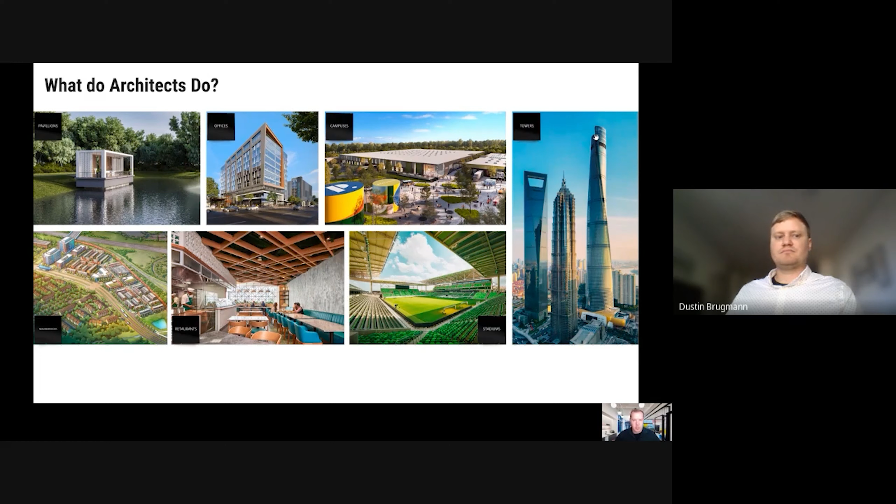In terms of roles, there are many different roles when working on any of these projects. On a larger project, some of these roles might go to individual people. You'll have a designer, a code expert, an urban designer, an urban planner, an engineer, which we call a project architect, who helps put everything together, a manager running the business side of things, and then sustainability experts. So on any given project we can have many different roles for people, or on a very small project it could be one architect doing all of these roles themselves.

So an architect really has to know a lot of different subjects, and we're constantly learning about all different manner of things that affect the built environment.

One of the things that I like about architecture is getting to draw and getting to create things. And the way we do that throughout the process is through hand drawing. We do a lot of computer modeling. We do coordination, so we work quite a bit with other people. And then when the project finally gets into construction, we're making site visits and working with contractor partners to make sure that everything we've designed gets built smoothly. So it's a constant process of learning and communicating ideas and meeting with different partners along the way.

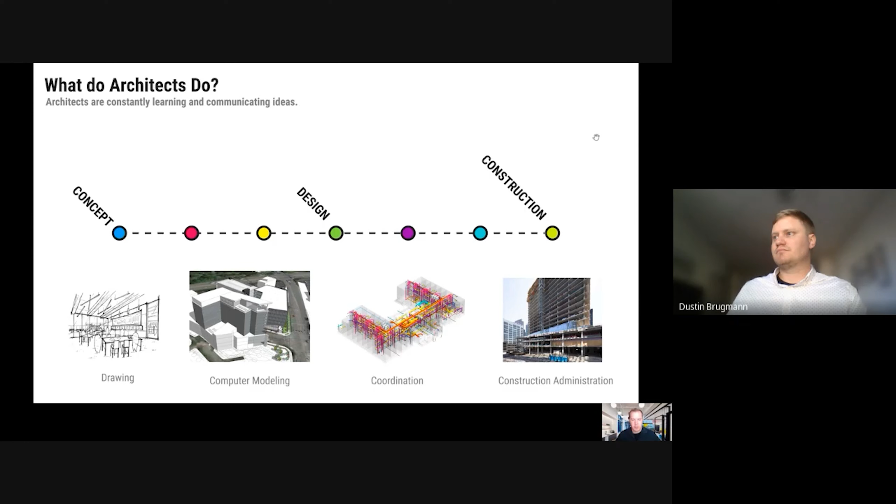And within Gensler Raleigh, being that we live in such a growing and dynamic area, we've been fortunate to work on a number of different projects, sizes and scales, from office buildings to interiors to retail shops and plazas. So as an architect, you get to work on a number of different things, meet new people, go different places. So it's really a fun and interesting profession.

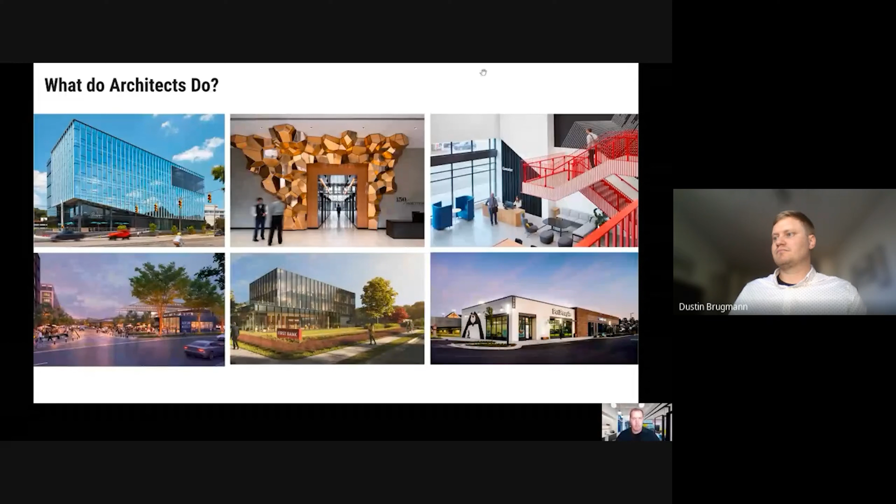Now that you've been introduced to the field of architecture, we're going to take you through a project example that will give you a better idea of what architects do.

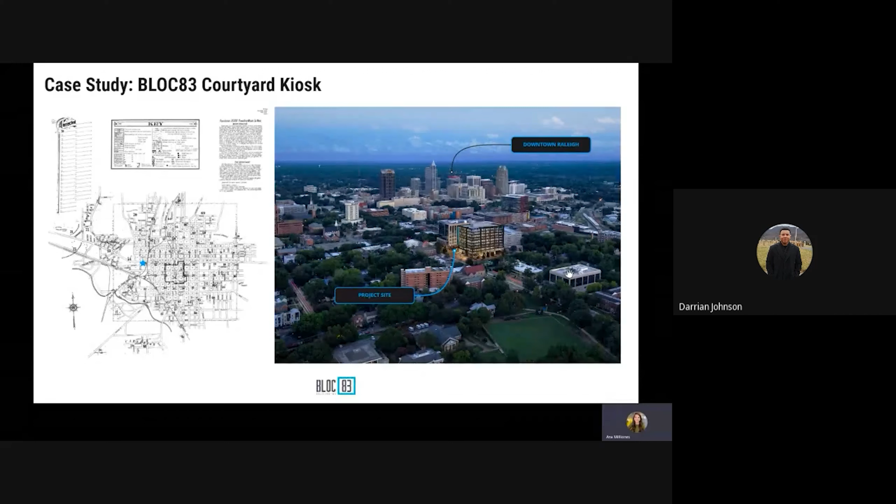We collaborate with landscape architects to design the areas around the building, like paving, planter boxes, and benches. The site is just as important as the building itself, and you will have an opportunity to design your own site with your project. Buildings start with an idea and a purpose.

A building's purpose is centered around how people will use it and how it's creating a better experience for its users. This is a retail kiosk, and it's intended to have a cafe-type program that can serve tenants from the two buildings along with the general public.

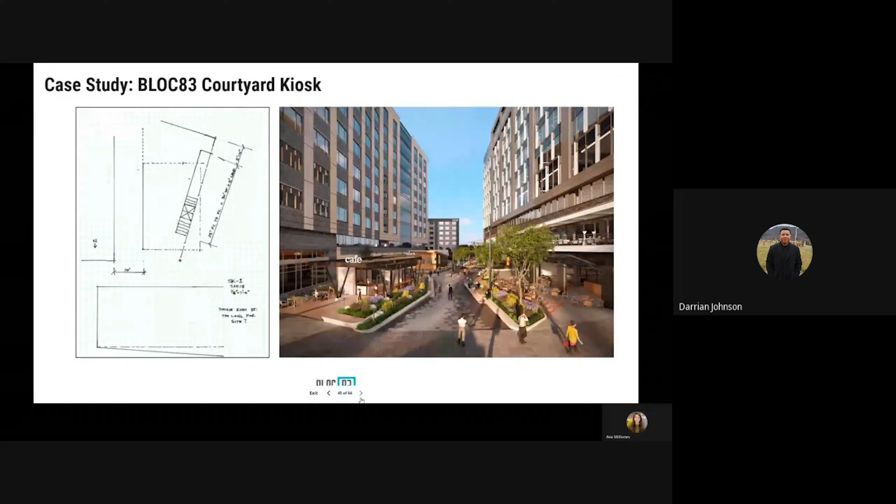During schematic design, it's important to push yourself on ideas and ask what if. It's the phase to really be creative and try new ideas, even if they may not work at first.

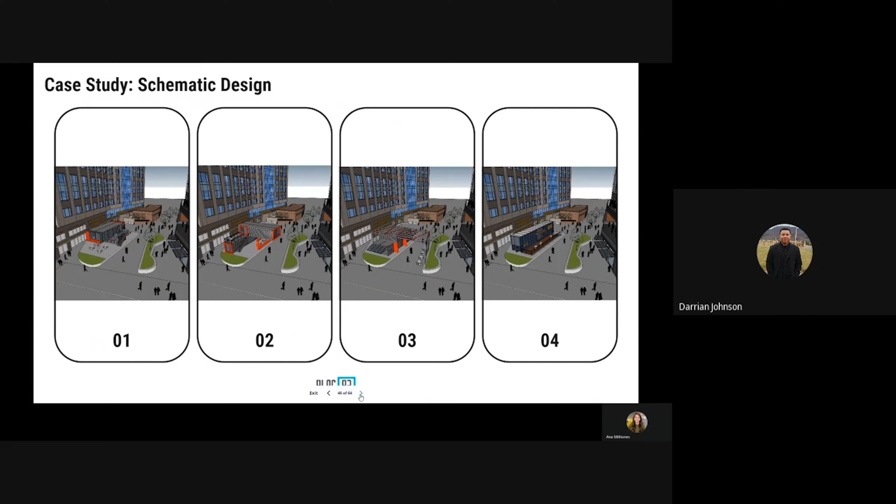We work through floor plans to make sure the right spaces are next to one another so we can ensure the building will function well. After schematic design, we move into the next design phases where more and more detail is layered onto the initial idea until the full project is complete.

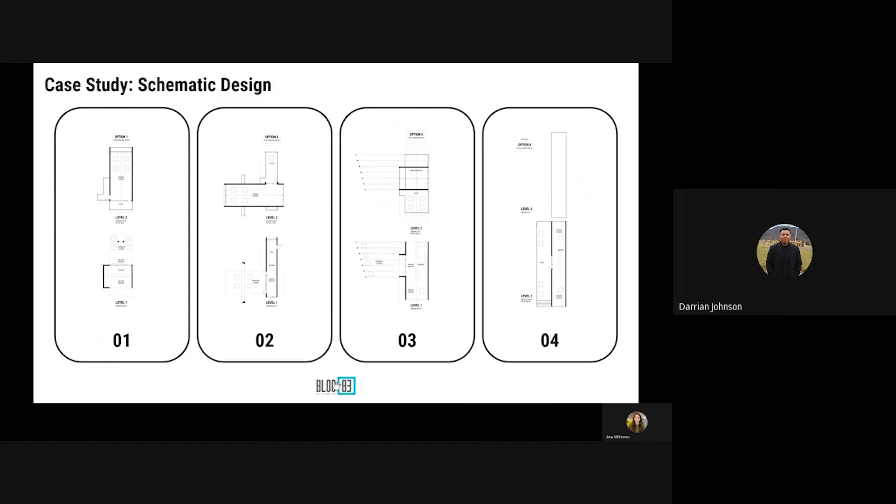The central part of the cafe is enclosed program, and the two ends open up as the outdoor space where patrons can enjoy their coffee and food. It can also be used as an outdoor work area throughout the day for the building tenants. You can see how integrated it is with the site design and how careful attention was paid to the user experience.

Next, we're going to take you through the construction document phase and show you what drawings architects create in order to realize a building like this.

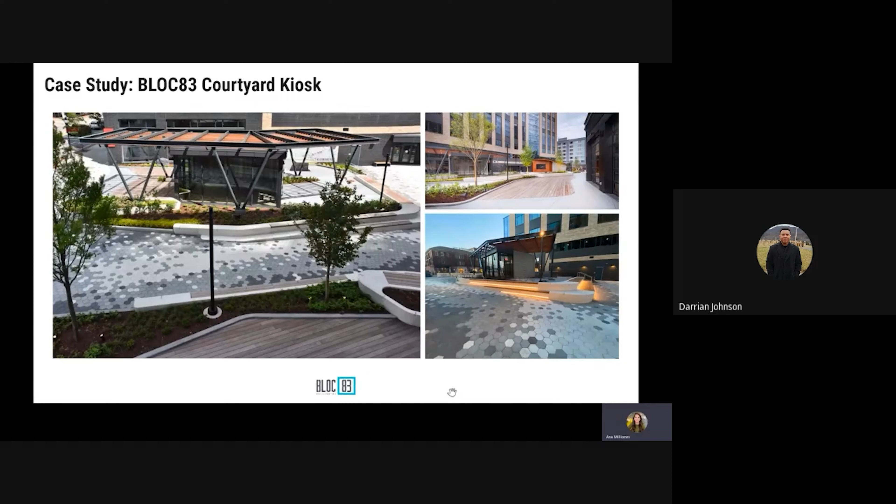I'm going to elaborate on what Kevin discussed, what an architect does, by diving more into the case study Anna presented and show you some of the drawings created to communicate to the contractor. An architect not only has to design a building, he or she must create a set of instructions in order for that building to be built. Firstly, a set of construction documents contains two things.

The actual drawing set, and a project manual with written instructions on how to construct the building and carry out the project. The drawing set or plans, as seen on the left-hand side of the screen, contain images that depict the actual building being built. Specifications that are part of the project manual, as seen on the right, contain written instructions on how to carry out the project and put those parts and pieces together.

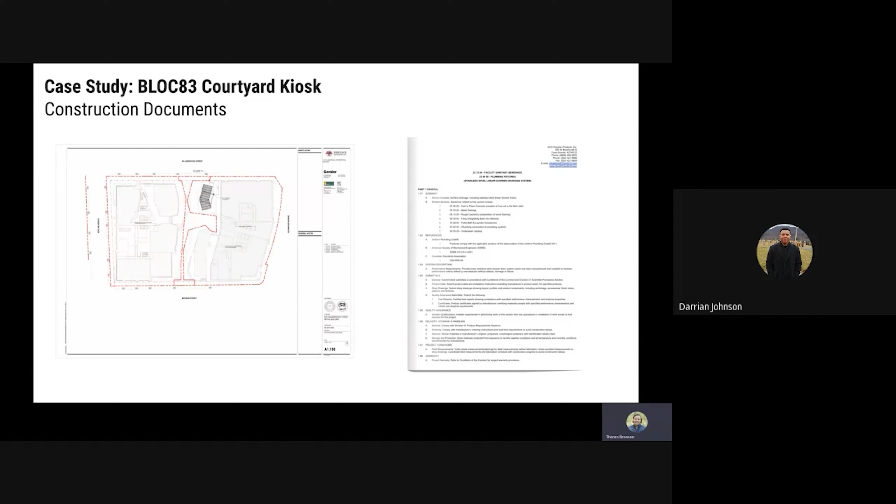With construction drawings, the images are always to some scale, so that way they accurately depict the building or elements, and they can be measured from the actual drawing set if needed. You'll learn more about this later, but a common scale is 1/8 of an inch equals a foot. Basically, every time the contractor measures 1/8 of an inch on the paper, it equals 1 foot in real life. Therefore, if the contractor measures 1 inch on paper, he or she knows that the element in real life will be 8 feet. The larger the fraction, the more zoomed in the drawing is. Again, you'll learn more about this later.

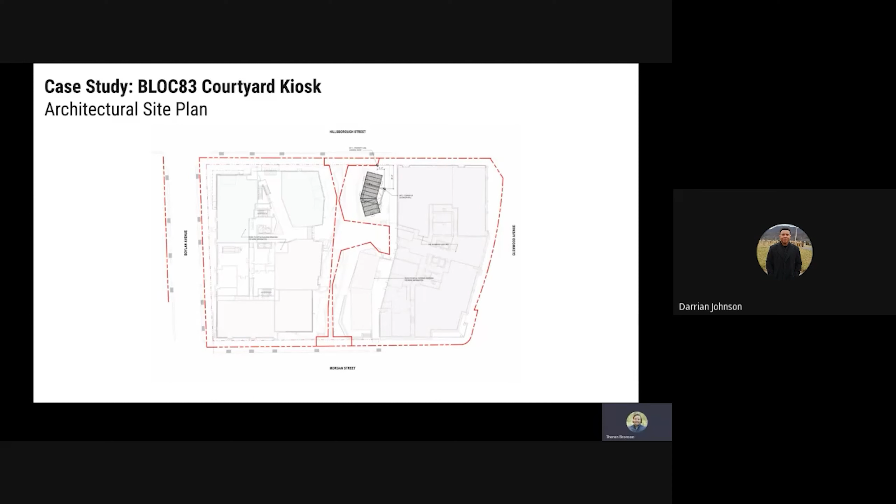In order for a contractor to be able to lay out a building, one of the first drawings needed is an architectural site plan that shows where to place the building on the site. Usually a reference point to the property line or a marker on the site is used to dimension the building to the actual site. You can see here that the reference point is at the intersection of these two property lines in red. The architectural site plan will show adjacent buildings, property lines, sidewalks, and roads, while other site plans in the drawing set, provided by other parties like the civil engineer, will show utilities and other pertinent information to the project.

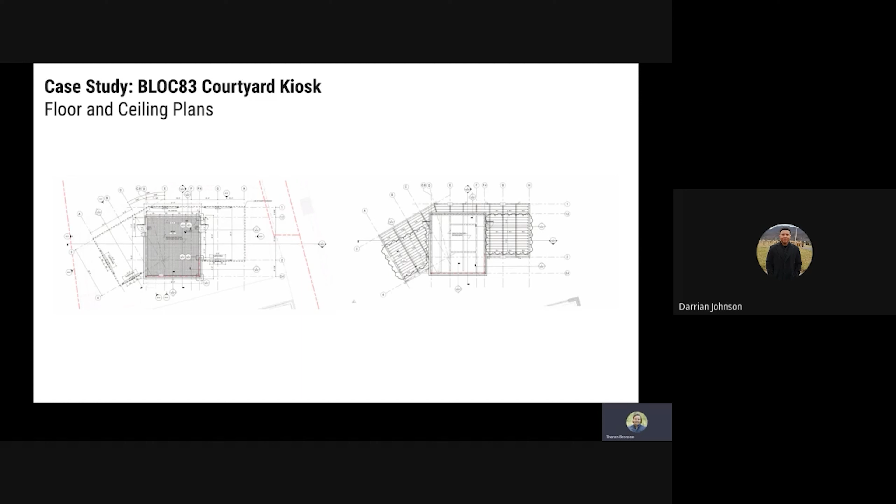The next set of drawings will be the floor plan, as seen on the left, and the reflected ceiling plan, shown on the right. These two drawings are horizontal cuts through the building showing what it would look like if you sliced the building horizontally and looked either up or down. Think of it like a hamburger bun. The ceiling plans are called reflected ceiling plans because they are flipped in order to align with the floor plan to make them easier to read. If they weren't mirrored, the information would be on the opposite side. Again, imagine a hamburger bun opening up and how it would be flipped. These plans show the horizontal X and Y dimension relationship of columns, walls, and doors, and they provide dimensions so the contractor can lay out the building accordingly. Sometimes references to heights are shown for ceilings and other elements if they're not called out elsewhere in the drawings.

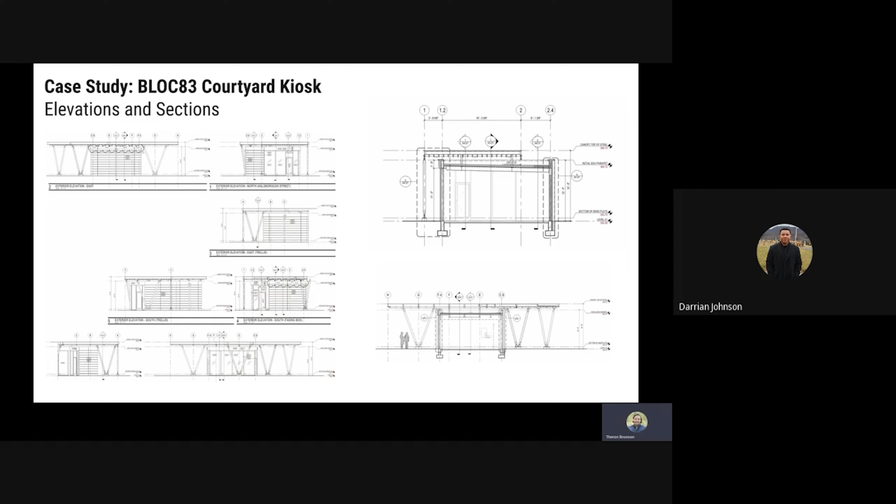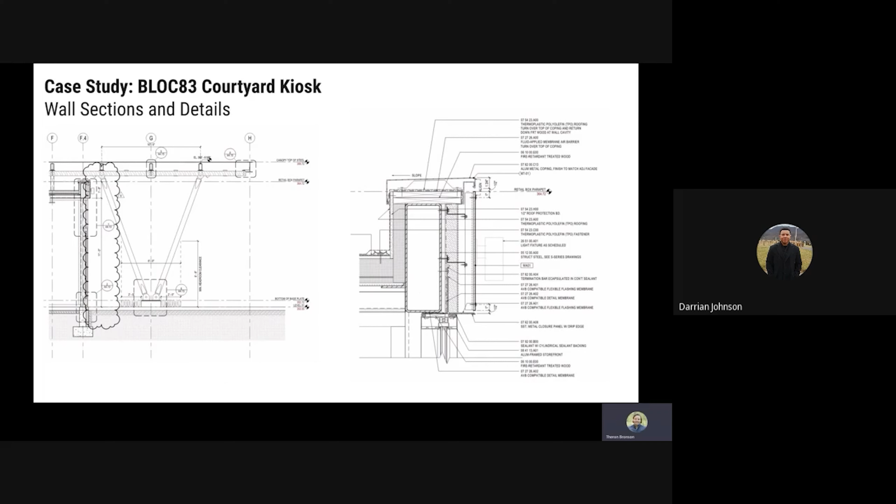Because buildings are complicated, zoomed-in drawings called wall sections and details are needed to show the assemblies of the envelope of the building. The envelope, also sometimes called the skin, is the exterior materials that enclose the building. There are several layers and parts that all work together, hence why it's called an assembly. Here you can see a wall section to the left and a roof-to-wall detail, called a parapet, to the right. To touch on scale quickly, the wall section shown on the left is 1/2 inch equals a foot, where the detail on the right is 3 inches equals a foot.

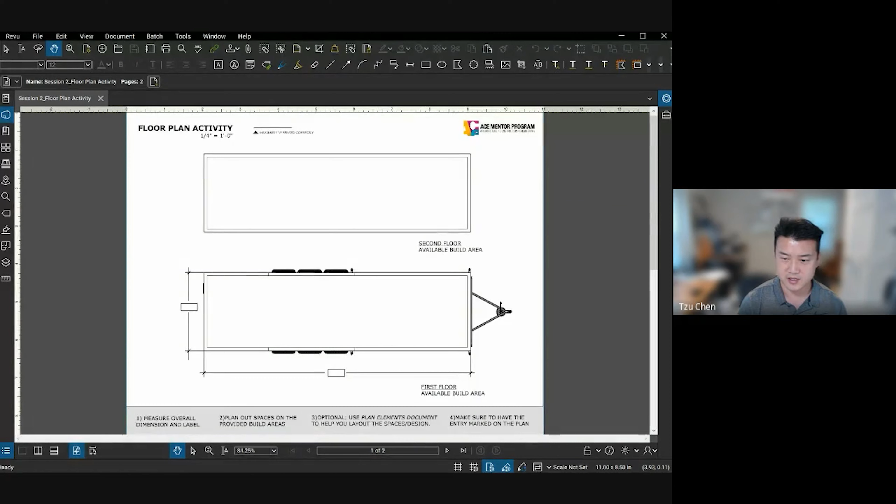Once Dina is bringing that up, the activity should be posted on your Google Classroom as the second activity. I think you guys had the scale activity the previous week, so she's showing you the activity associated with the architecture. Is everyone seeing the floor plan? I think you are. Yes? Okay, sorry, I can't see you when I do this.

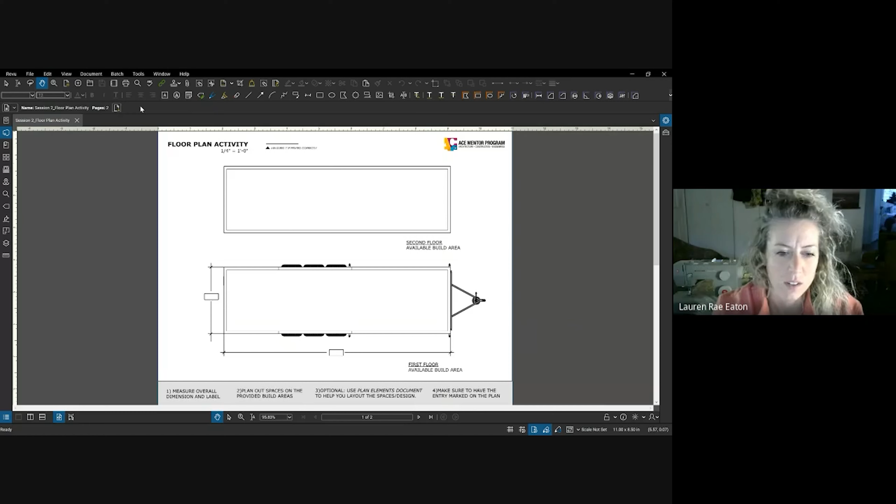Just a quick note for the students' benefit, this is just a PDF file, accessible to all of you. If this program seems unfamiliar, it's called Bluebeam. I'm not sure if Bluebeam is available to students for free. There's a trial version for 30 days, but I haven't seen a student use it. A lot of architects and engineers use Bluebeam, so this may look different when you open it on your screen.

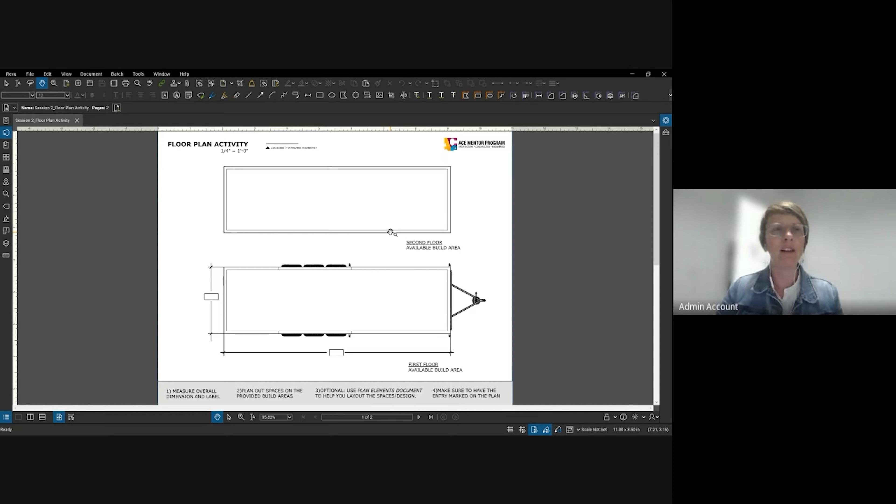But the floor plan activity has 2 pages here. And the intent of this is not to be the be-all end-all of your kiosk floor plan, right? This is just to get you started, to get practice with using the scale, understanding architectural scale and drawing to scale.

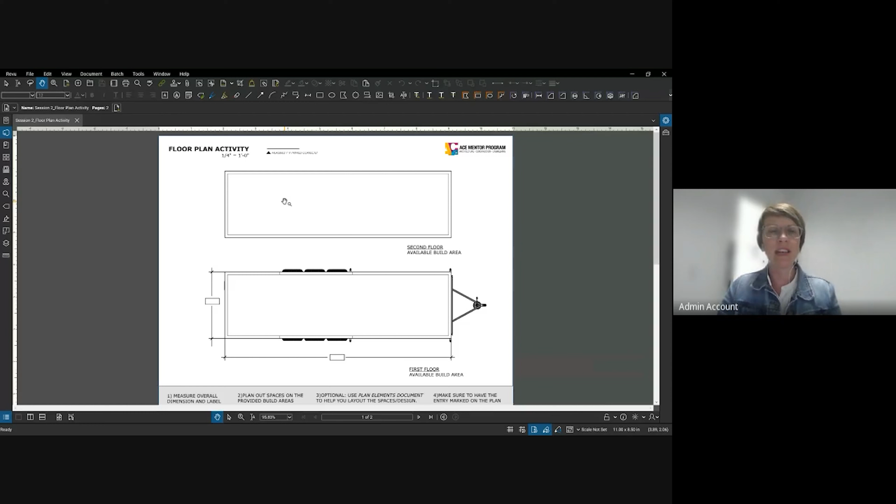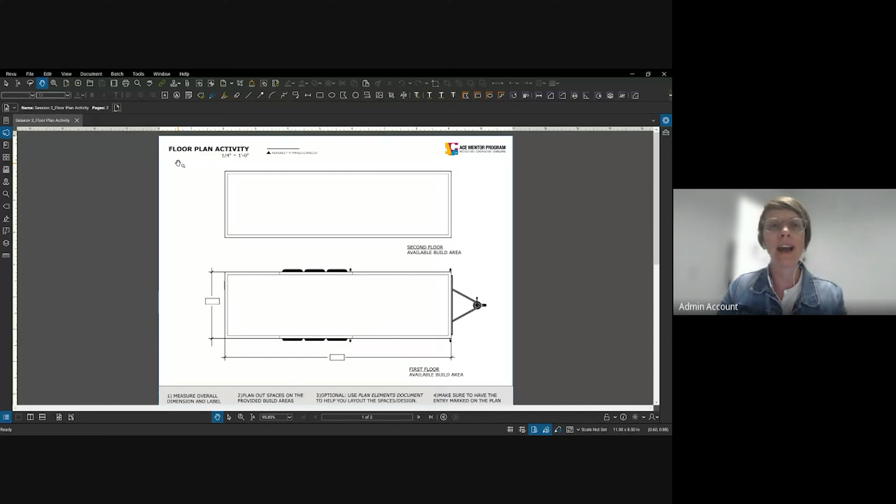If you remember from the video, or if you came in late after the video, Theron talked about the hamburger analogy. The floor plan is like taking your hamburger, removing the top bun, and looking down at it, or slicing through it and removing the top. Typically, a floor plan is taken around 4 feet, 3.5 to 5 feet above the floor. You can see here that there's a first floor and a second floor laid out.

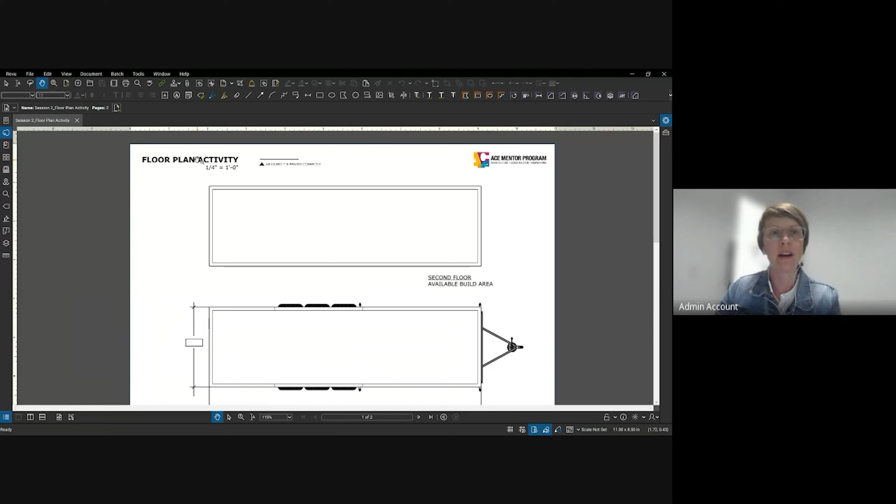The floor plan activity scale is 1/4 inch equals 1 foot. So if you print this out at home on an 8.5 by 11 and don't scale it, print it at 100%, then this line right here should measure 1 inch. That's kind of a key if you want to print it out and try that at home.

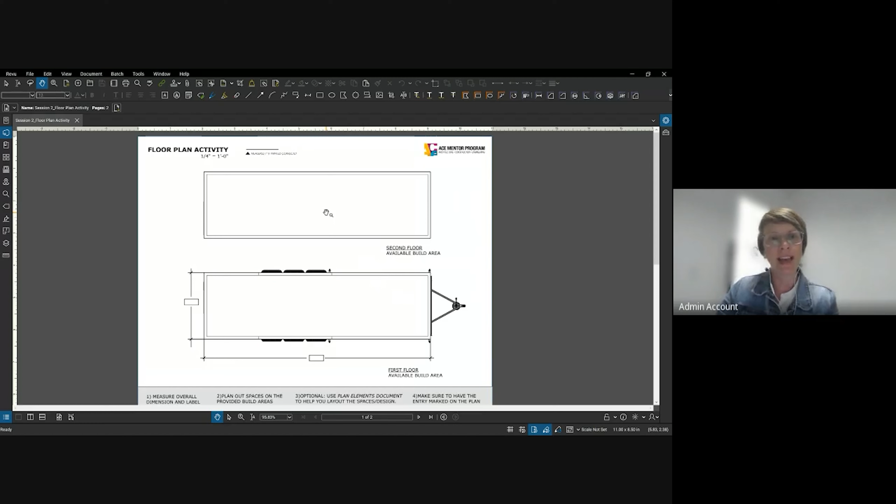So you can use what you learned from the scale activity to start to understand the dimensions of your trailer that you will be moving your kiosk to the site via. There are instructions at the bottom. Step 1 is to measure the overall dimensions, so the length of the trailer and the width of the trailer. Those little boxes are where you would write your answers in feet and inches.

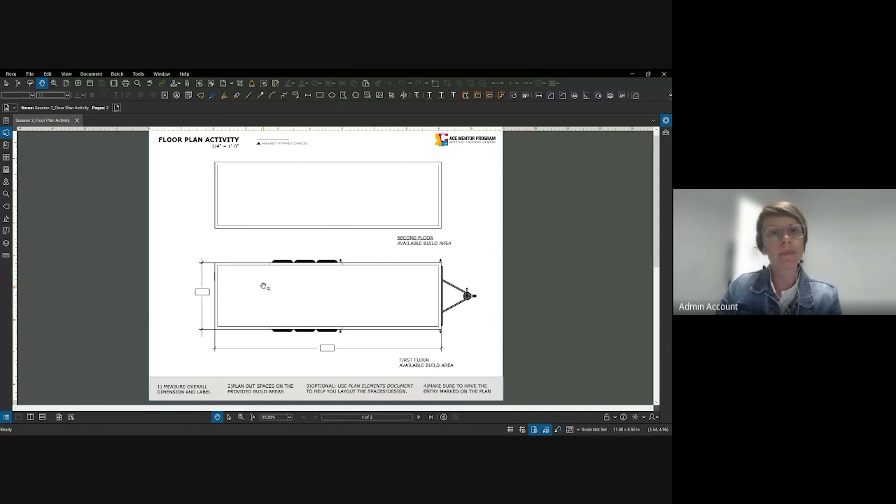Step 2 is to plan out and start to think about the spaces that you would want to have. I'll also say, I don't think your kiosk is required to be 2 floors, but it can be. We have a height limitation that we'll talk about more in next week's elevation activity. We are using the infamous Peace Street Bridge as our limit of 12'4" total height, so that in case your truck driver needs to go down Peace Street, they will not get stuck.

You can start to basically think about what you want to include in your kiosk. Step 3 is to use the plan elements on the next page. Anna's going to talk more about that.

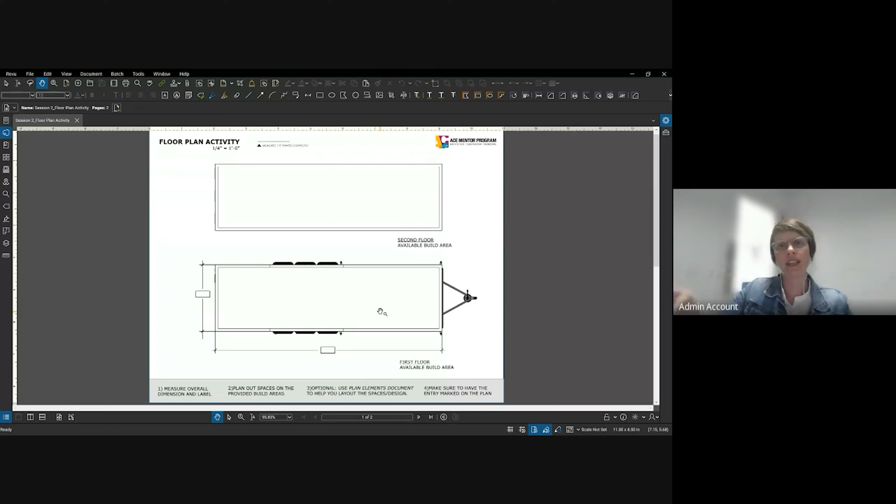A reminder in step 4 to make sure you think about the entry. Where would you want people to enter? Ryan showed some really cool examples of modular units that folded out from the trailer. So your entry can be something that pops out from the trailer or steps inside of it, if that makes sense. Lots of endless ideas there.

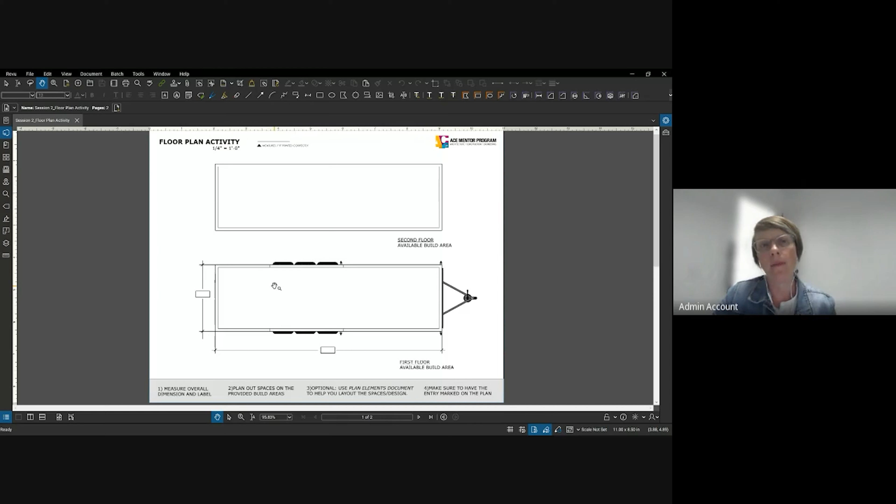Also start to think about where you place plumbing fixtures, sinks, any cooking you might need to do, as well as windows within the kiosk if you want any. So I'm going to let Anna talk about page 2.

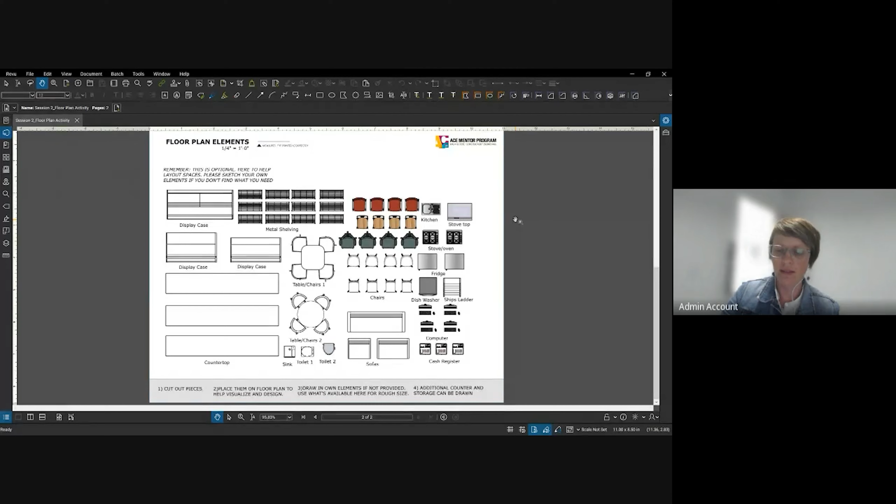Anna, are you with us still? I am, sorry, I was double muted. Yes, hey everybody, so thanks for going over that, Dina.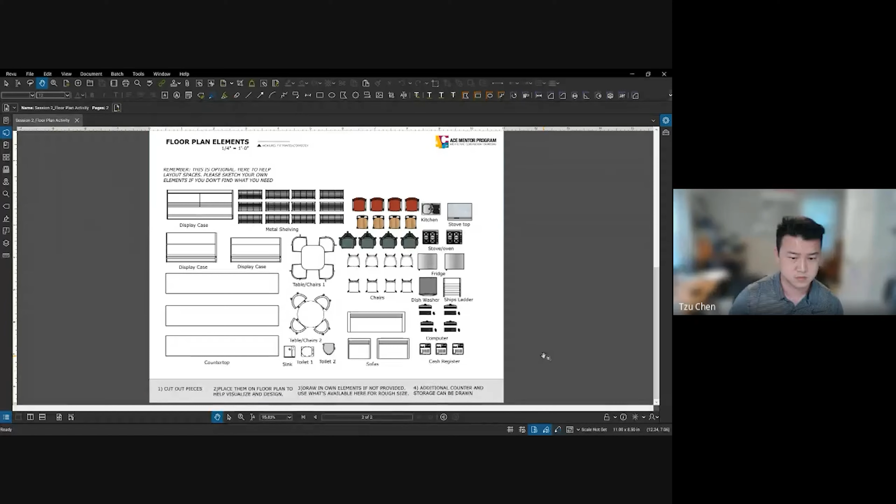I think this is the fun part when you get to really start to think about what your program is going to be and how people are going to use this space. We've given you a sheet of components and thought starters around what might be in the kiosk, so you don't have to feel limited to these by any means. You can look up different sizes of things and create your own if you'd like, but you're also encouraged to print this at 100% scale.

Cut these pieces out and start moving them around on your floor plan, getting a sense for how much space you'll have and how things will lay out. You can see some components we've dropped in here, like display cases or storage shelving for what you might need depending on its use, some tables and chairs, equipment over on the right. A lot of times you need a cash register if you're going to make money, and a computer.

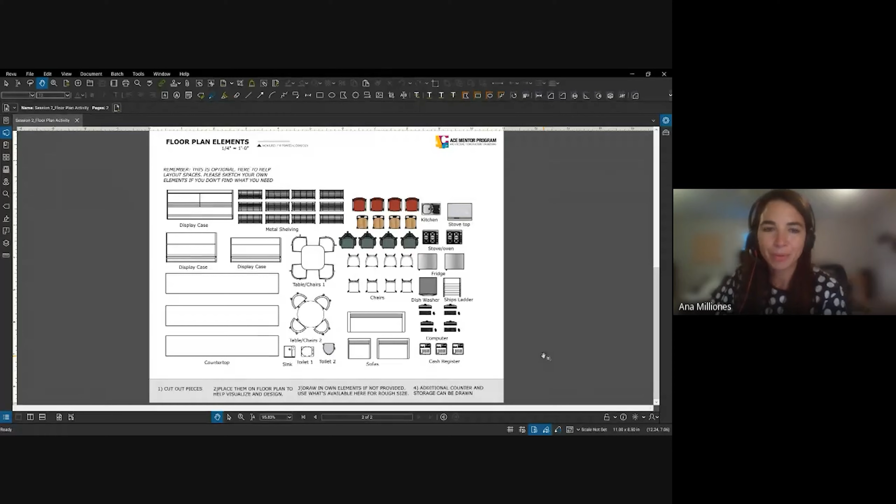And so maybe you have a menu. Just thinking through a lot of those components, these are just a way to get you started and give you some scale to the floor plan itself.

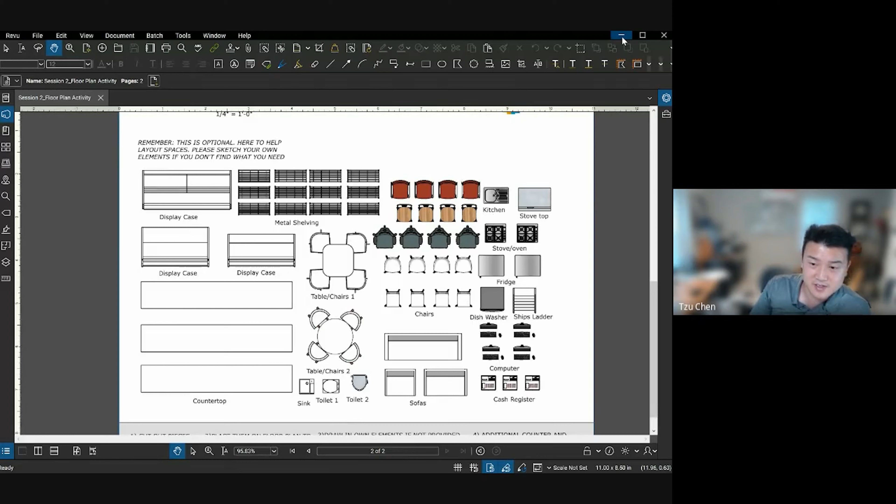Going back to what Dina said about the height restriction with the bridge, was it 12 feet 4? That's what I Googled today to confirm. So to think about that, if it's 12 feet 4 inches, and you had a really low ceiling of 8 feet, that doesn't leave you much for the second floor, probably 4 feet left.

So what's probably going to end up happening for the second floor is more some sort of storage area or another space for a mechanical room. Think about that when you develop your second floor area, it's probably not going to be occupiable, meaning people won't be on it. Unless it's a roof deck, right? Oh yeah, and if you didn't have a roof on it, you could have a place for people to occupy, if you wanted to give them a view or a different vantage point. So something else to think about.

Because there is a limitation to the trailer in terms of its width, length, and height when it's on the road. But when it gets to the site, if it's contained in the trailer, maybe you pop it up from the second floor, so it's an element that could pop up. Your height limitation is just to get it there.

This is why we love being architects. Yeah.

So that brings us to the conclusion, that's the activity. Everybody should go get the activity from your classroom, print it out, and start thinking about what you want, confirming what you want your kiosk to house first of all. What kind of kiosk is it? What's your program? What do you want to sell or share or give away from that space?